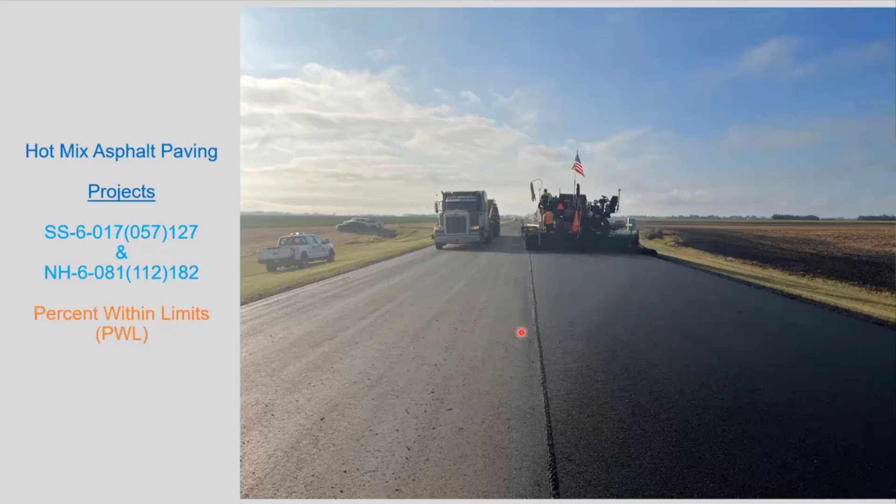So this was a project we did. Part of the presentation here is just going to be on a project that we did this year in the Grand Forks District. It was on Highway 17 and 81, which are both national highways. And there was PWL on this project as well, and there were several other special provisions also.

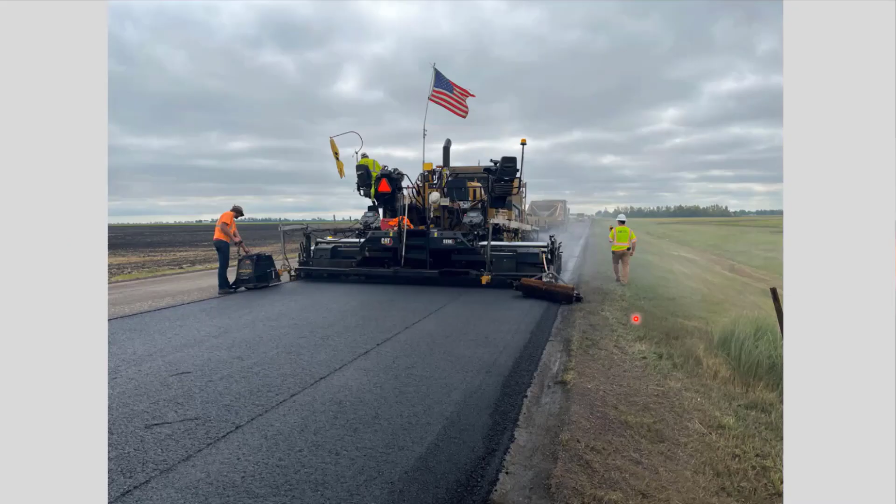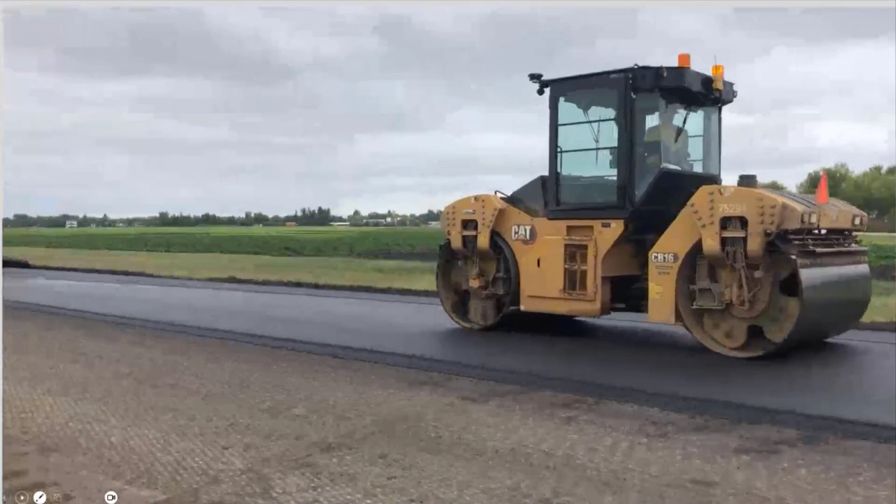The project contractor was Knife River, and Lynette Stain was the project engineer on this project. And so this was really a nice project because it had a lot of the intelligent construction things that we're using now, with the IC or intelligent compaction on the rollers, and then the paver mounted thermal profiling as well. And it had a few other things too.

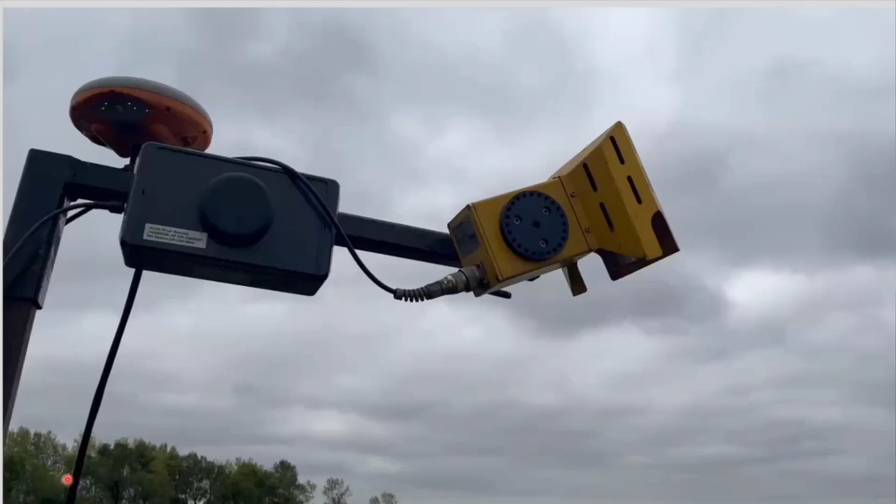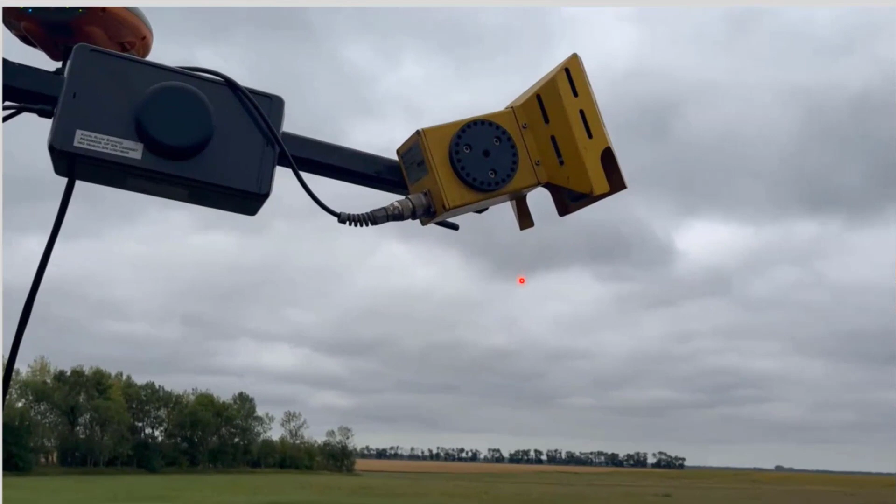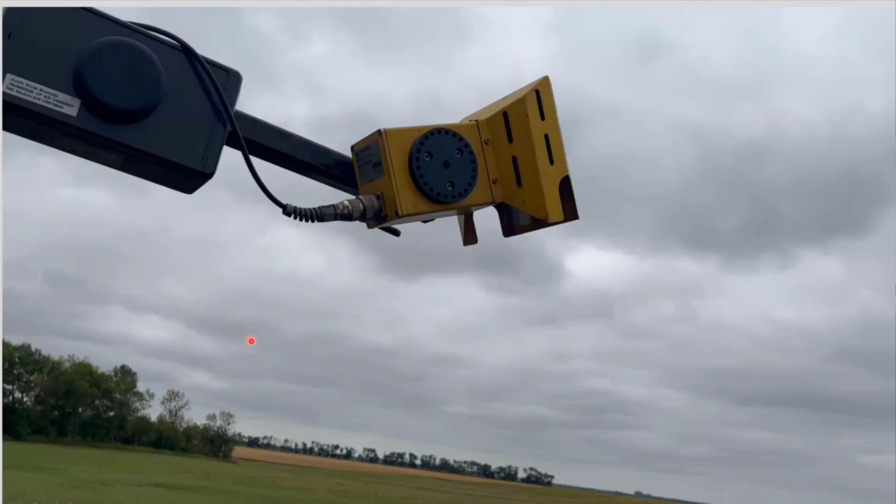So for those who are not really familiar with the thermal camera, it's mounted right on the paver, and it's taking pictures of every square inch of what gets paved as far as the infrared surface temperature, and records it. And then we can go back and review all that in a software called Veda. This is the new generation camera that's just come out now too. So that's another version of it.

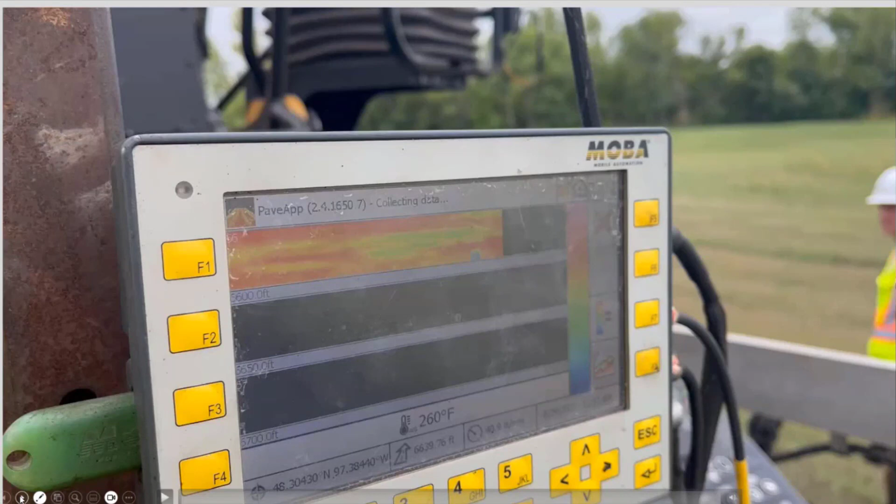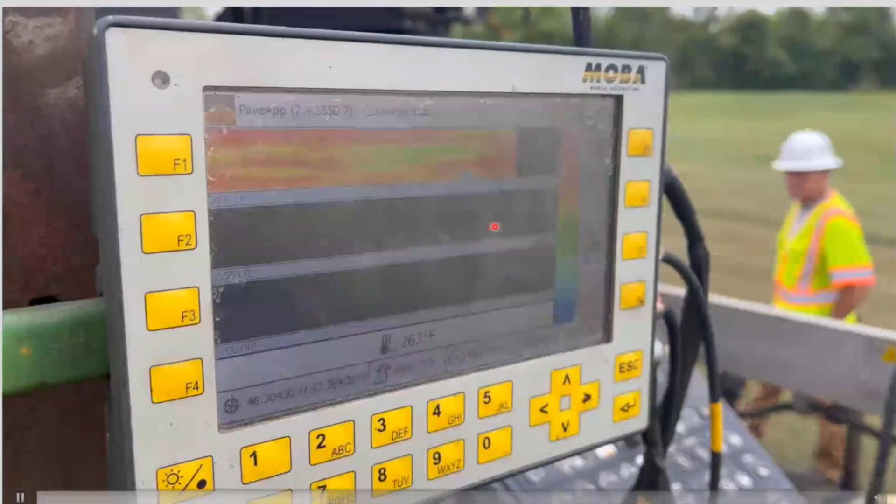One of the things, of course, with all this data, as Ken was mentioning earlier, is that we want to be able to use it real time. One of the things that's on the back of a paver right now, so that the paver operators can watch, is the actual profile coming out. And so if there's anything that they see, like segregation, then maybe they need to address it, or things of that nature.

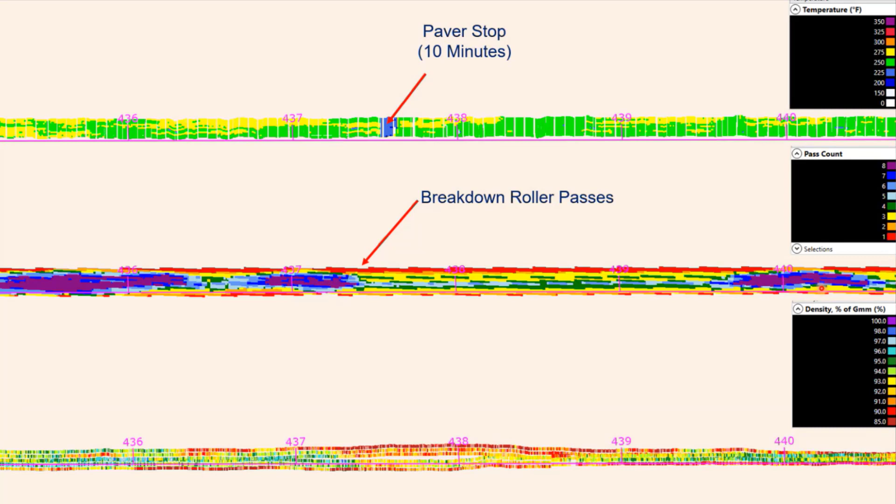Some of these things like you see here are really caused by the rollers going back and forth, and they get done with that segment and they move up. Well, they don't want to miss any, so of course it gets overlapped, and that's what this is. But you can see it actually shows up on the density, which we expect it to do. Here's another one, the same thing.

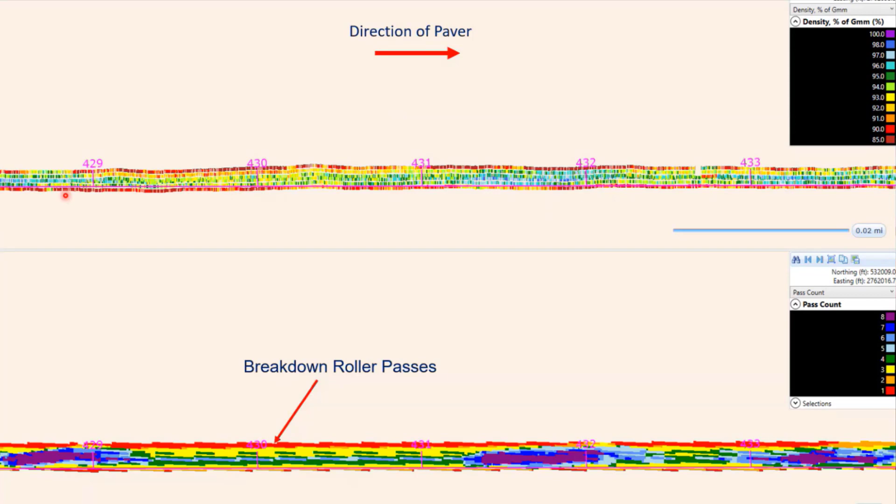You can kind of see that the densities from the DPS are showing a little bit more where the passes are. Not a whole lot more. The difference between them may be 1 or 2%, but still, it's sensitive enough to know that. I would think something like this would be really good if you're doing PWL jobs or something that has to have a lot of uniformity involved, so that you can keep your roller passes constant and things like that.

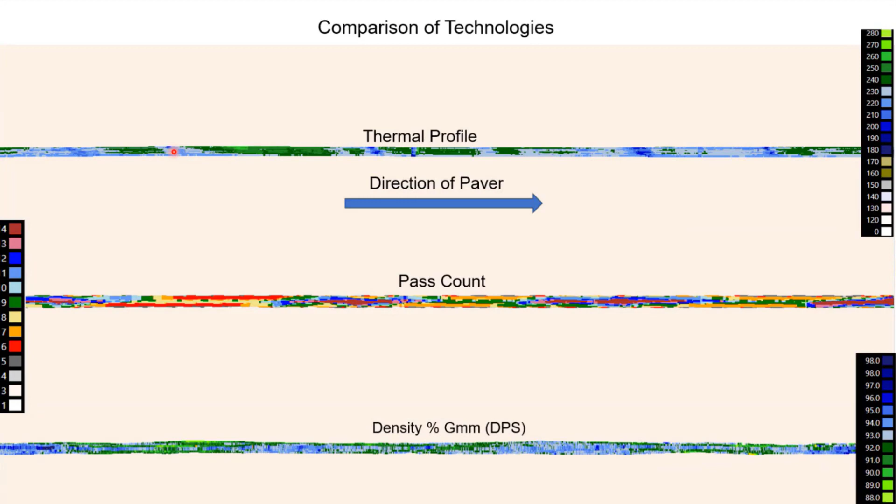So here's just another one of those. Once again, these are a couple of projects that were done a couple of years ago, actually. And same thing here. There's some more of it right there. You can kind of match it all up; these are a little bit different colors, as you can see on the densities, but you can see it's definitely sensitive to the roller passes.

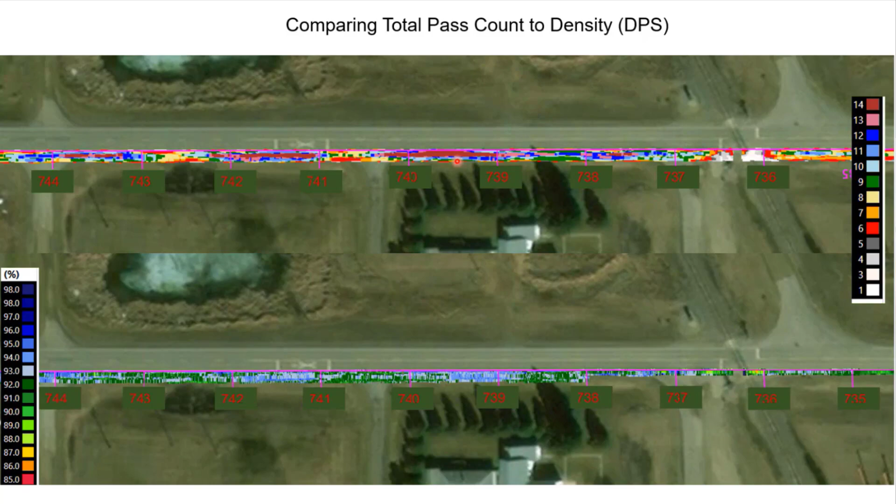I don't have a lot of e-ticketing other than it was used on this job. It didn't really have any data to show. However, I will say that this is going to be something that's going to be included with the Veta software eventually. I don't know if we'll be using it or not, but it's actually going to be included in the software. They're actually working on it right now, and so I think that'll be interesting.

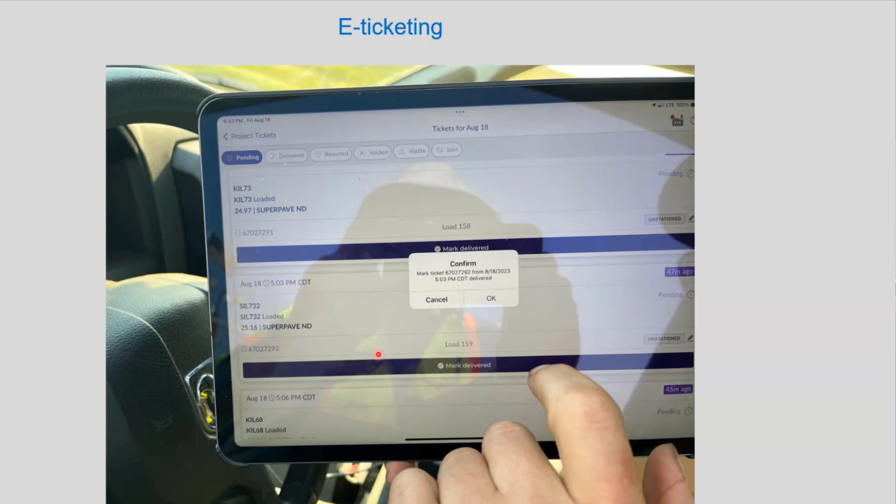It'll be able to display, right on Veta, where the trucks were and everything. So this is Todd Mansell from Caterpillar, who was up a day here on this project. And so this is a typical picture. He was taking it from the back of the paver with a thermal camera.

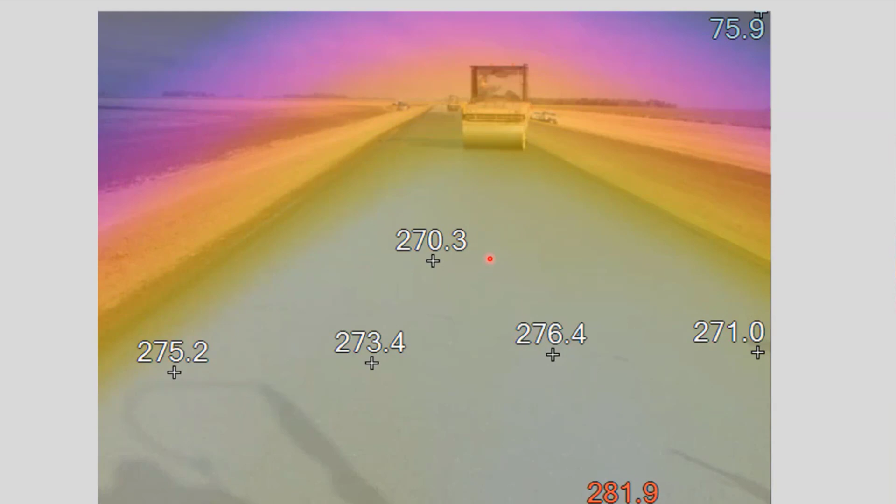And this is the next one right here. That's actually the thermal image of it. And so you can see those are really nice temperatures. That's really nice uniformity across the whole mat. And we really didn't know the time that we took this. Well, he knew from his camera what time it was, but we didn't know the station.

So I was able to go into the Veta program under a time filter, and you can put in 2 minutes of time there on a certain day, and it'll display that 2 minutes or 1 minute. And so this was the area that was actually done, and you can see from it that it's pretty nice colors. I realize it's not all constant, but it's within the 5 degrees or so.

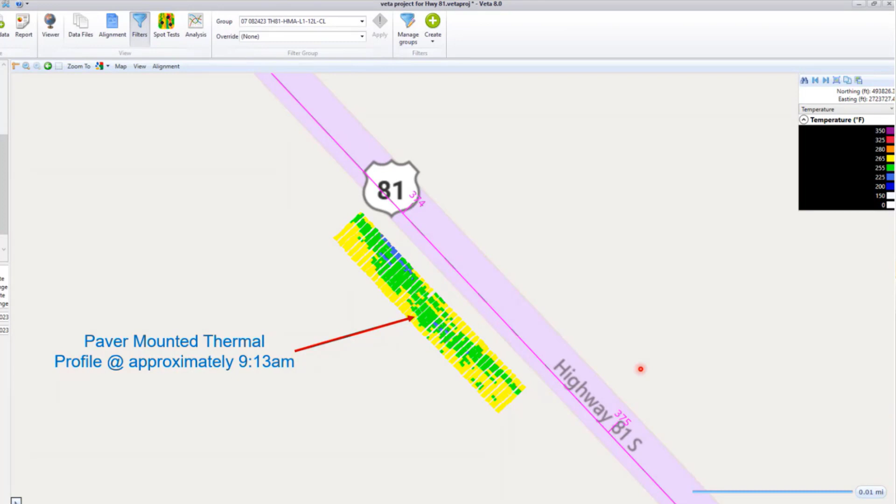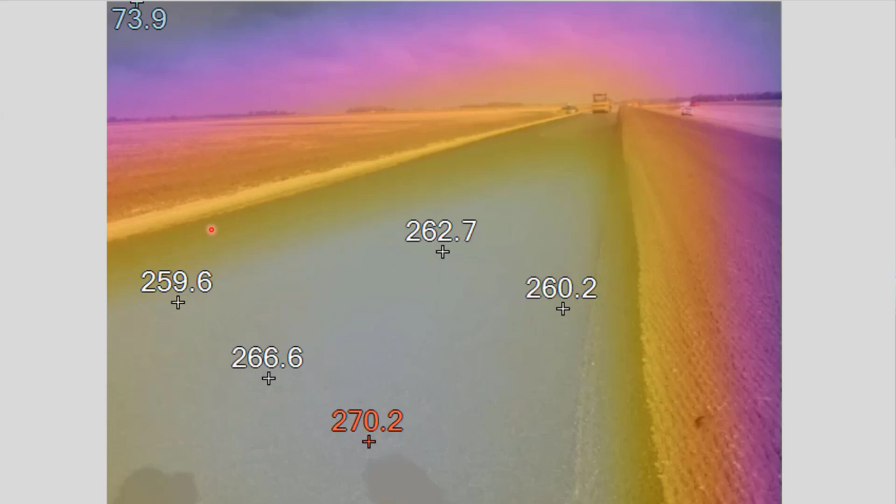Here's another one I thought was really nice. Uniform temperatures across the mat. And here once again is that same area in Veta.

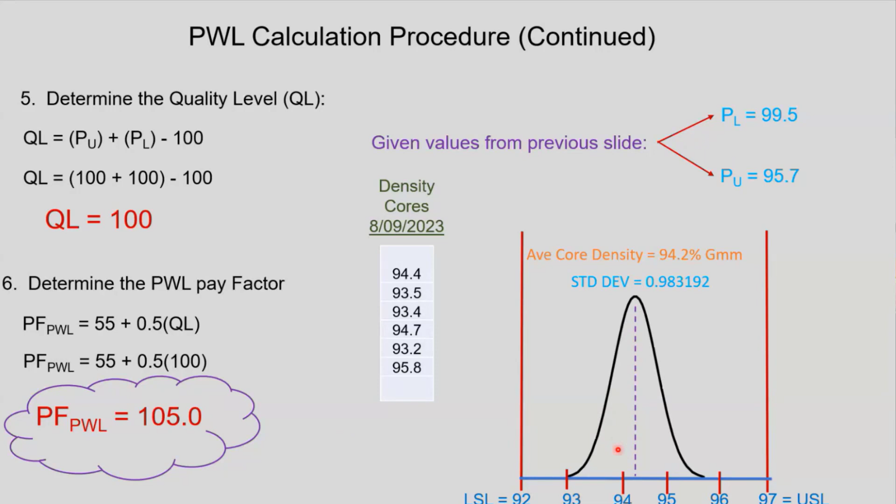We did some performance testing. We were fortunate enough, Arlene and I in the district here. Materials and Research graciously purchased an IDEAL-CT machine to use, and it also has a fitting to do the new rut test also.

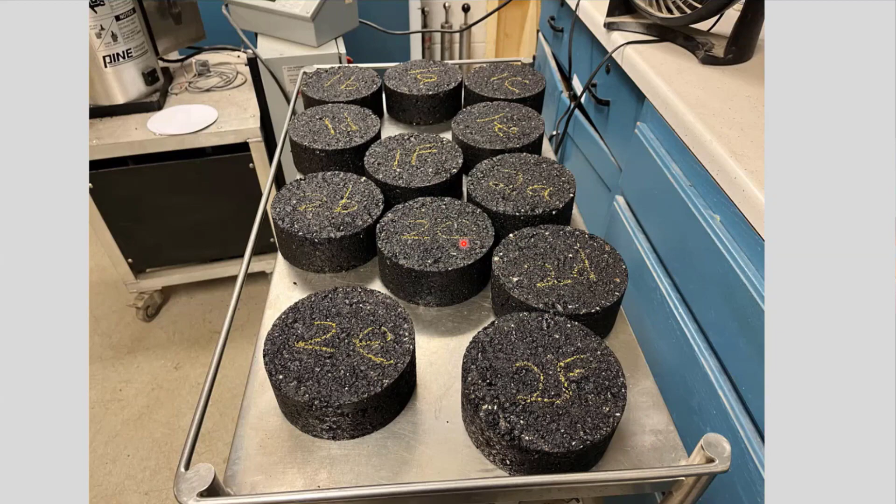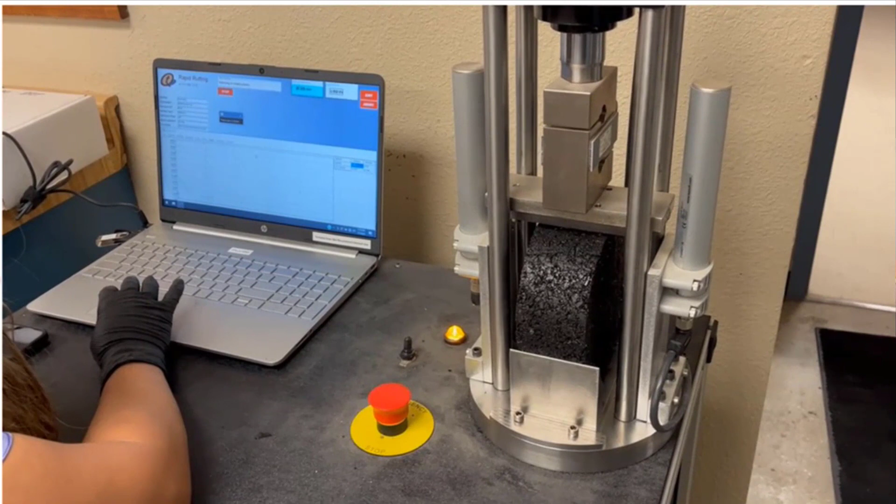So this was Arlene here making some of the plugs. They're about 60 millimeters high, and you can make them in the gyratory, and you cure them for a certain amount of time, and then you can break them. And this is the rut test one here, as she's doing it. Once it breaks it, this is checking the susceptibility for rutting on a certain mix. And then it displays your result on the computer afterwards.

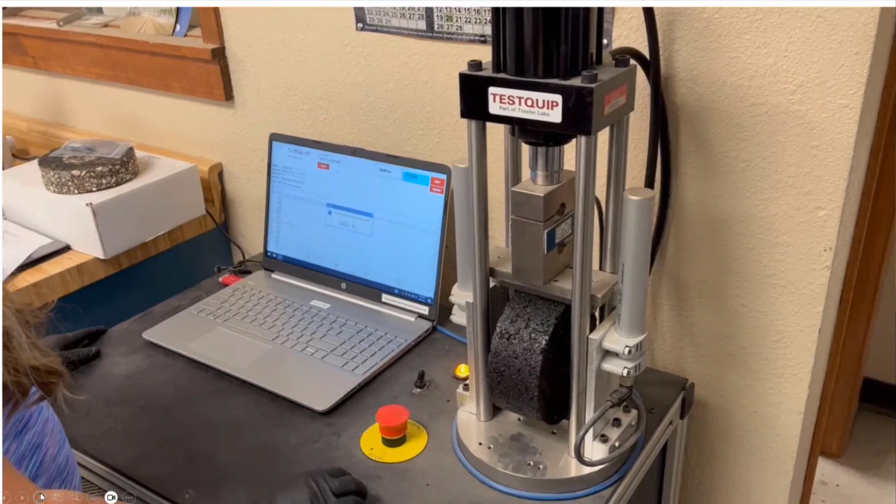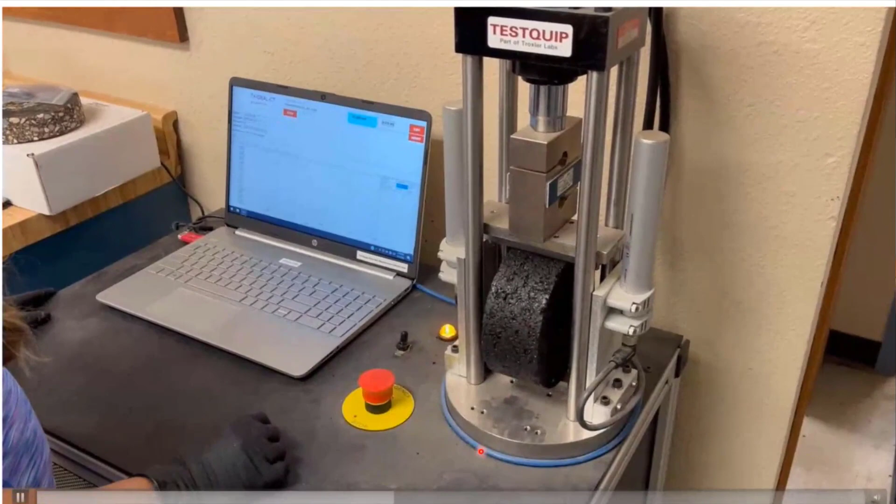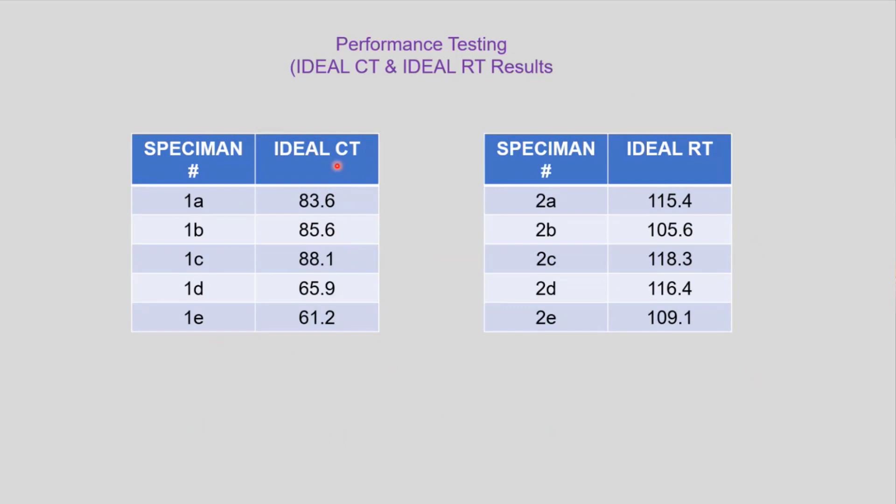This is the CT, which is the crack testing part. And once again, it's the same thing, only you just have a different thing down here so that it puts it in a kind of a tension mode instead. This is some of the numbers we were getting. These are index tests, they're not tests that you would use for pavement design or anything, but they're just kind of good relative numbers.

So the last part of the presentation here, I just want to go over a few things that we kind of see from projects over the state in Veta. Now that we have Veta, we can see a lot of things. And if we've got some issues, we can go in there and see what happened.

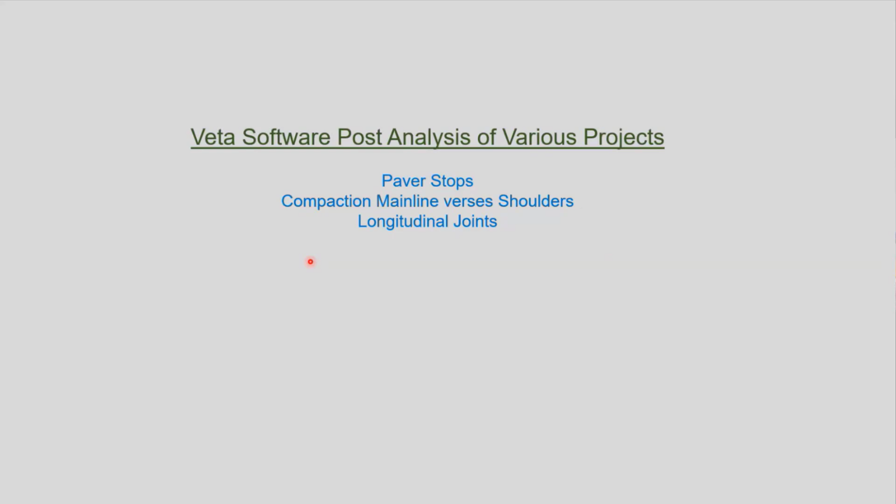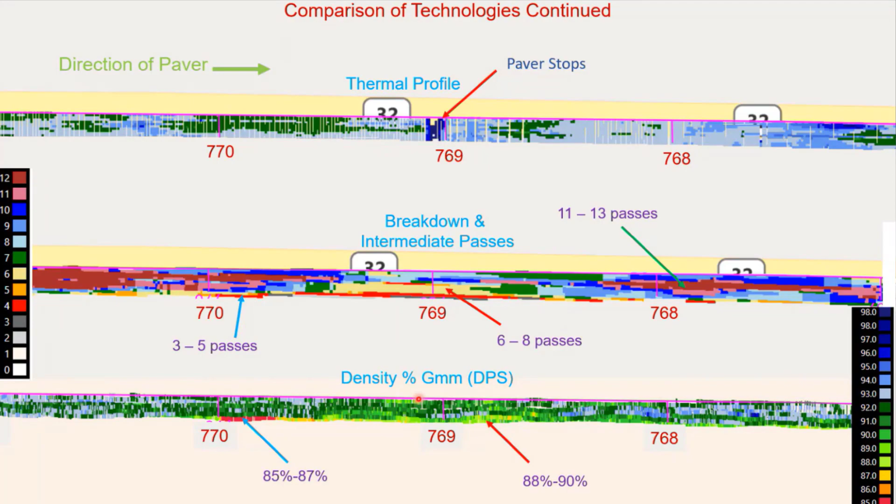So one of the things, as Ken was talking about, was paver stops. And as you can see, once again here, we've got a paver stop. I don't have the time on here, but right around that paver stop, there weren't as many passes. And of course, the mix cools off, and you see it show up on the density as well with the DPS.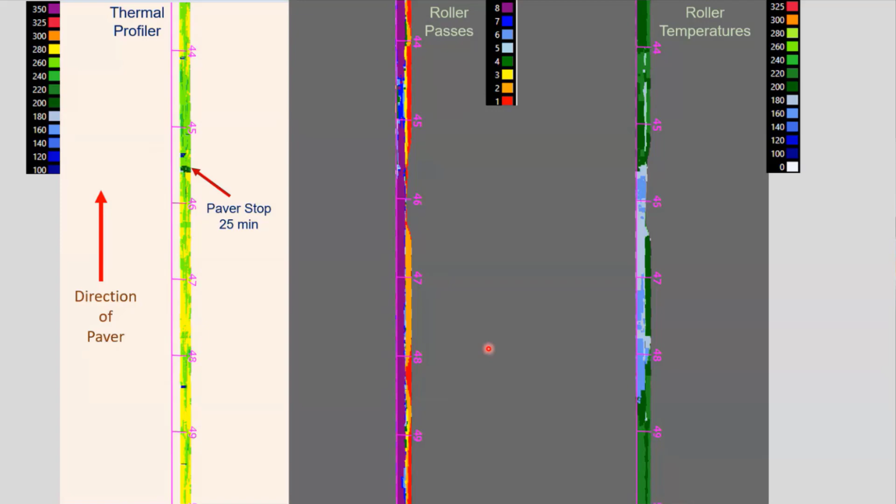Here's one of the things that Ken touched on already, the shoulders and the mat. We're getting great densities on the mat and the joints.

But the shoulders are out there too, and if you have wide shoulders and you're paving, say, 18 feet wide, you might as well say that a third of the mat is shoulder, and it's only getting ordinary compaction. This is our ordinary compaction spec.

I won't go over it completely here, but basically it's using the same equipment that we use for specified density, and we need at least a pass with the breakdown, and we need an intermediate rolling that has some combination of a pneumatic roller, and then the finish. A lot of it has to do with compacting it so it's tightly bound and shows no displacement, in the opinion of the engineer. So these are good inspection things to be watching out there.

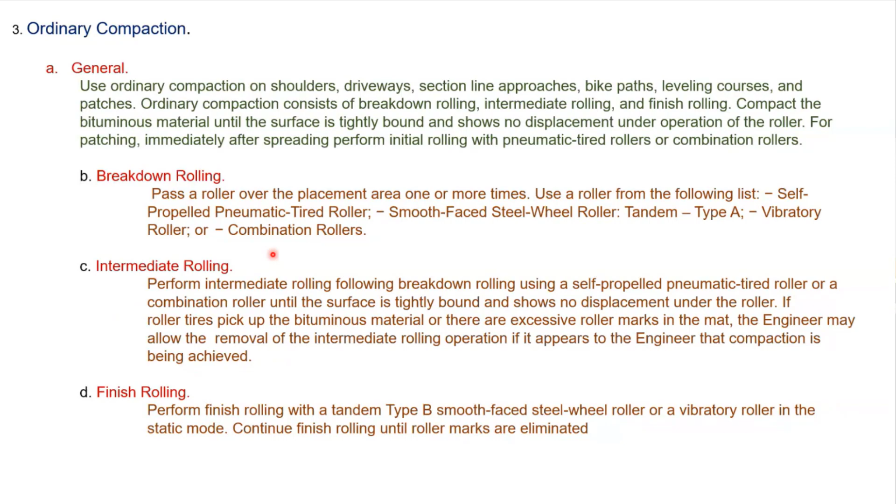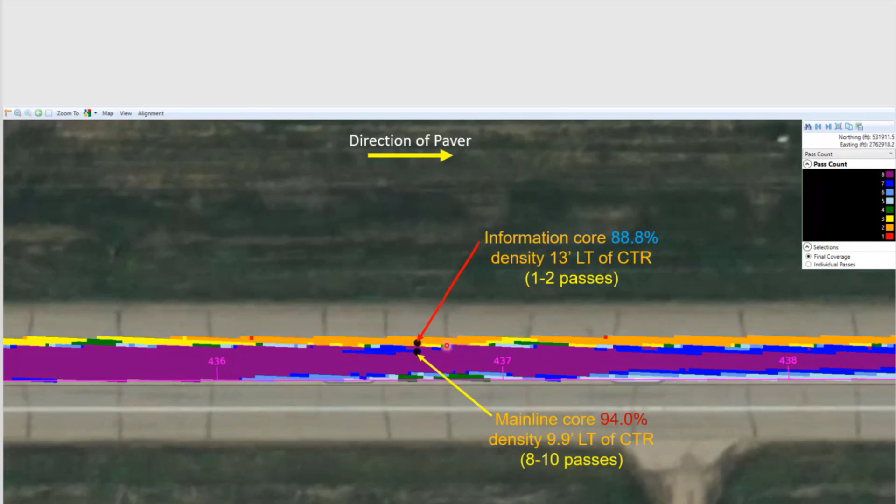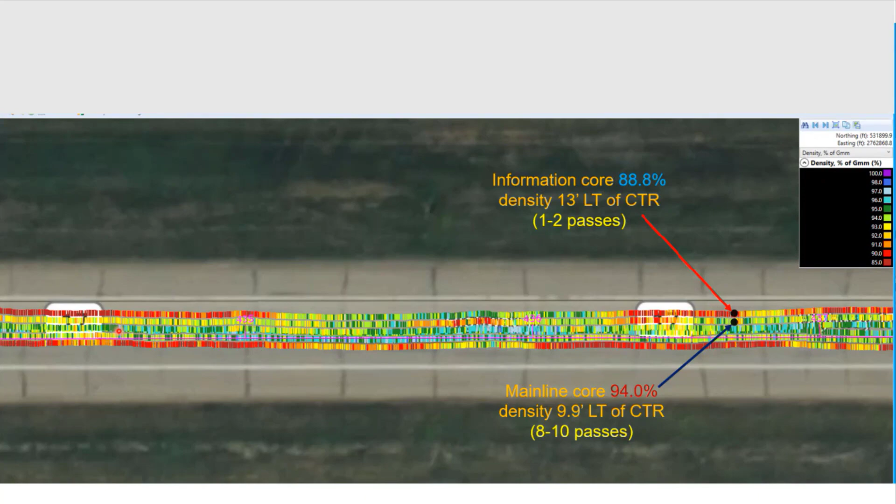Ken had shown this one already, so I'm going to move on from that one. This is a DPS of that area. You can see this core up here that was just taken. John was running along the edge there, and you can see there was a lot less density in those areas. I remember when John was up here, he said that when he was running along the edge, he could see the raw data was going to be less. Ken had shown this one already.

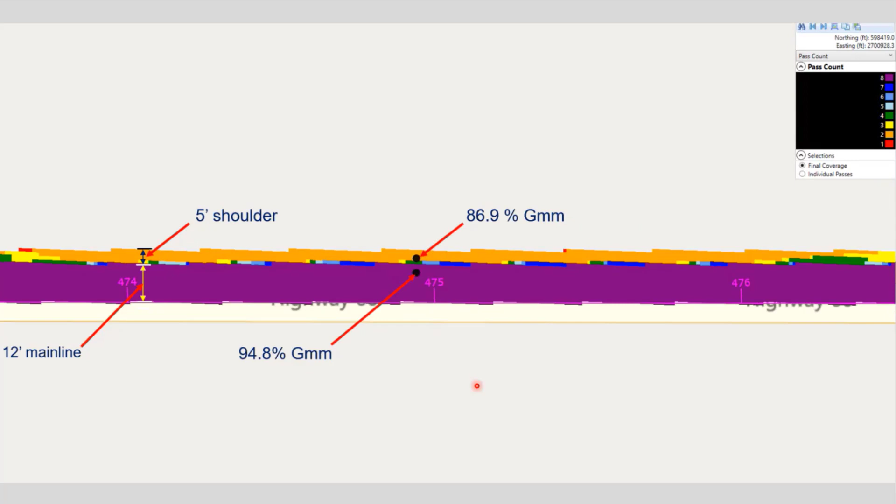So it's not just passes either. This is the temperature at the initial roller, whatever roller hits it after the paver goes by. As you can see over to the left, and I've seen by observation as well, the first rollers go right for the joint. They start right by the joint and pay attention to it right away on the breakdown roller, and then they move outward.

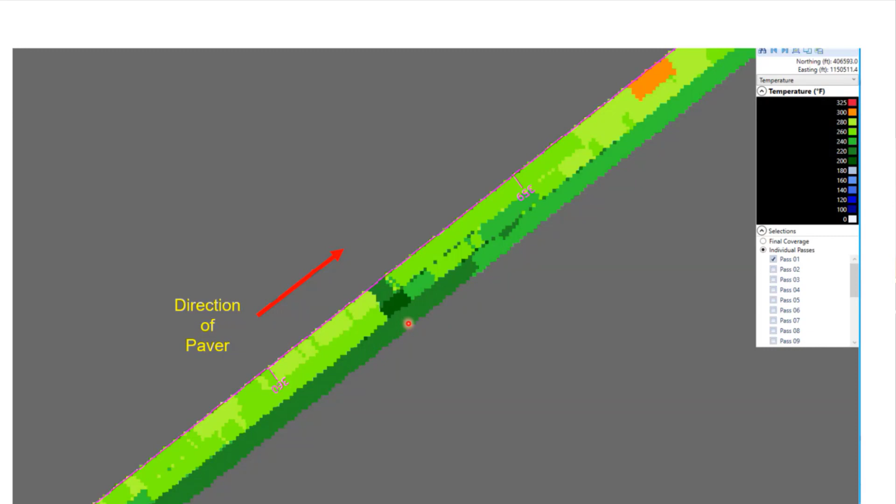If you look closely enough here, about every 6 feet the colors get a little bit darker, showing that time has gone by, and by the time they get to their next segment on the main line, it starts to cool off. And finally at the shoulder areas out here, you're getting cooler yet. So sometimes it's not only fewer passes, it's lower temperatures.

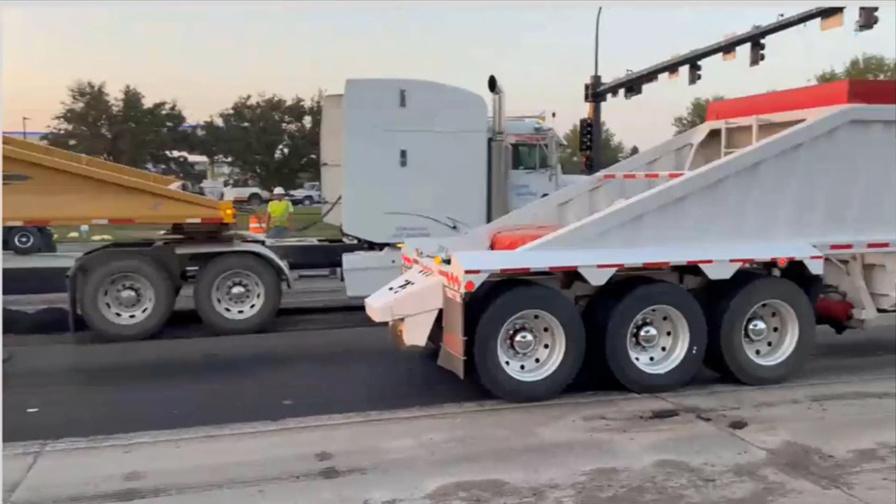Switching gears now. On 32nd Avenue we had, as we talked about earlier, echelon paving. This was quite interesting. I thought it was very good coordination from Knife River, how they put all this together. It was right around 7 o'clock at night; they deliberately tried to start a little later, but there was still a lot of traffic, and it was near intersections. And I thought it went pretty good, actually.

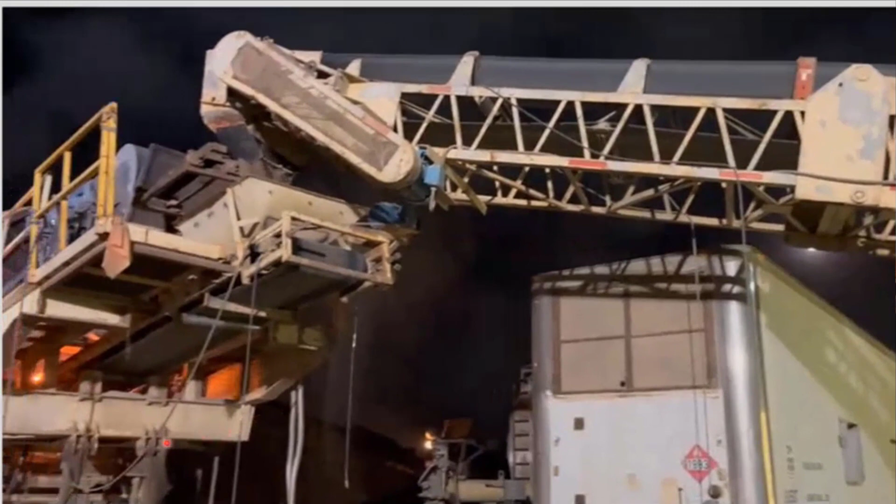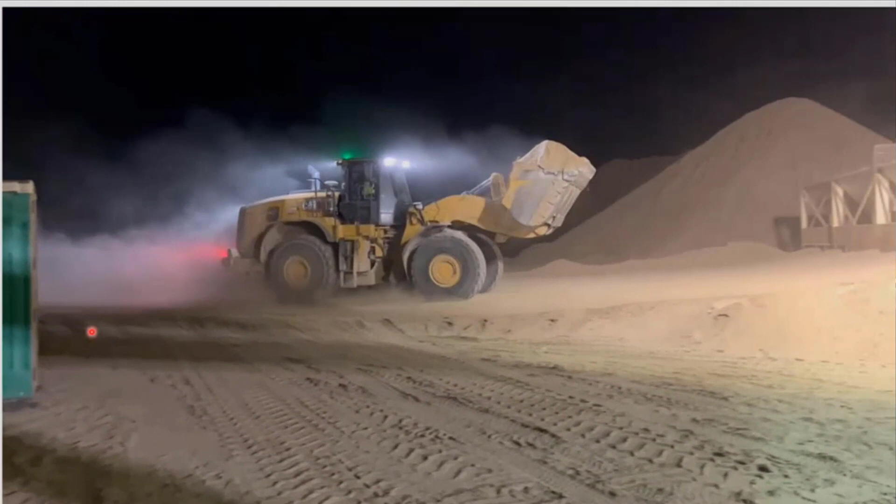They actually went through the night and paved that job, and it was interesting to watch the plant in the evening. I'm usually out there in the daytime, but it was nice to see how it worked at night. This is just a picture of the front end loaders loading the different stockpiles into the cold feed to go up to the drum.

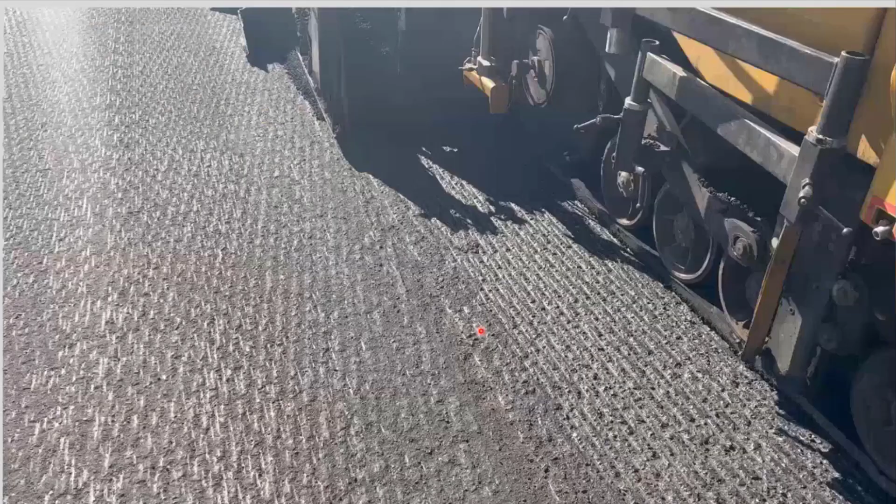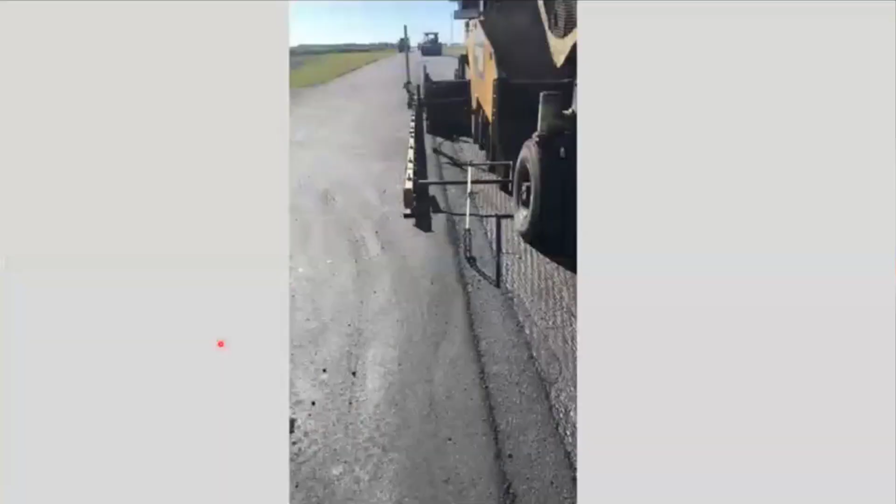Just lastly on joints, hopefully with all the compaction we have on our joints now, we're going to be able to fix this and not have them start failing 4 or 5 years before the actual pavement is failing. I think the notched wedges are helping a lot out there, and it seems like more and more jobs are getting them. This is just the second pass.

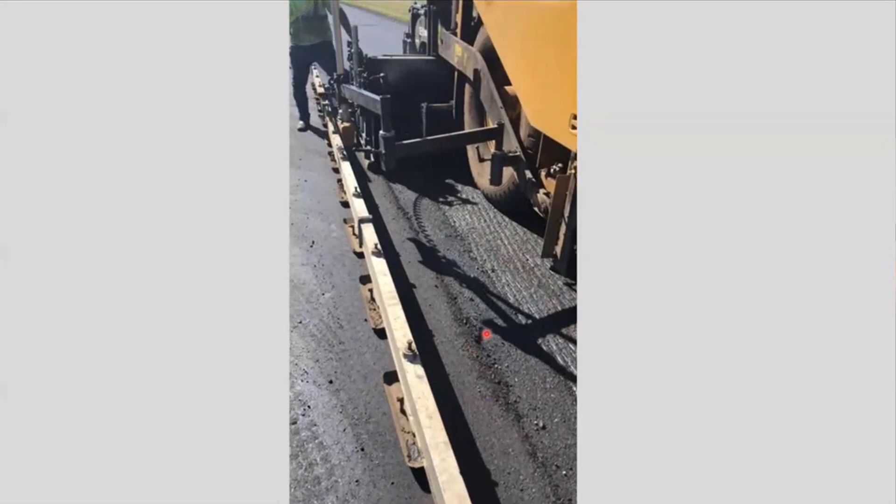One thing about this is you can see the joint is nearly horizontal now instead of at a 45-degree angle. If you look closely here, you can see the joint. This is one from the notched wedge, so you can see the joint itself, or the two layers there. So that is all I got.